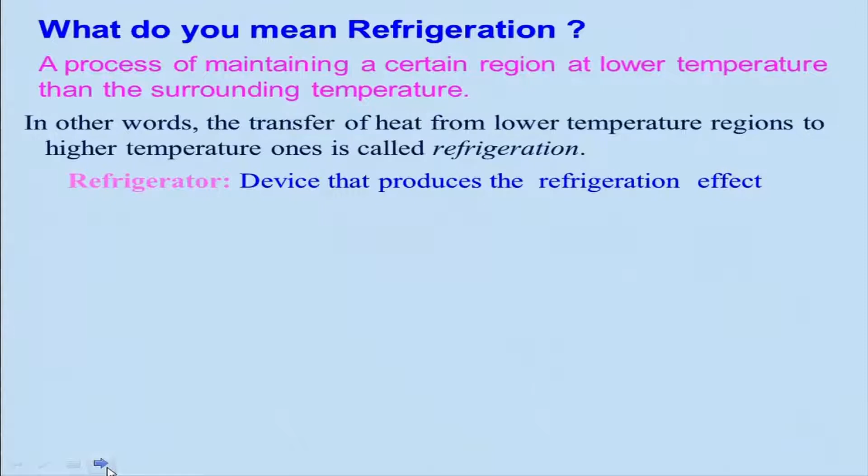In other words, what is being done here is heat being transferred from a lower temperature region to a higher temperature region. Of course, you need to provide some amount of work, and when we do that, we call it refrigeration. Basically, a refrigerator is a device that produces the refrigeration effect, or the cooling effect, you can say that way.

Air conditioning is a little different. It is not only producing the cooling effect, but it also conditions the air, meaning the quality of the air has to be controlled. So we will be discussing the refrigeration cycle, the cycle used for analyzing the refrigeration system. We call it the refrigeration cycle. In other words, the refrigeration system operates on this cycle.

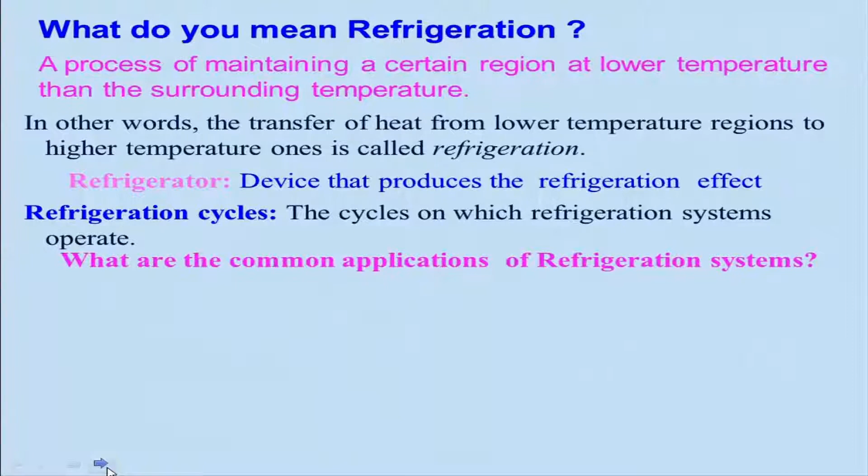If you look at the common applications of refrigeration systems, as I told you, there are air conditioning systems, refrigerators used for cooling food and other materials that easily get spoiled, and other things in factories. You might have seen on the way to our academic campus a liquid nitrogen plant and liquid hydrogen plant. These also use refrigeration systems, and I would suggest you go check what is happening there and what is being covered in class.

So the common applications of refrigeration systems are refrigerators, air conditioners, heat pumps, and gas separators. If I want to separate gases from air, say nitrogen or oxygen, I can go for low temperature, convert into liquid, and then separate them. Ice production is a very age-old application, and liquefaction of gases is another. For example, we use liquid hydrogen and liquid oxygen in spacecraft, rocket engines, and cryogenic engines. There are several other places this can be used.

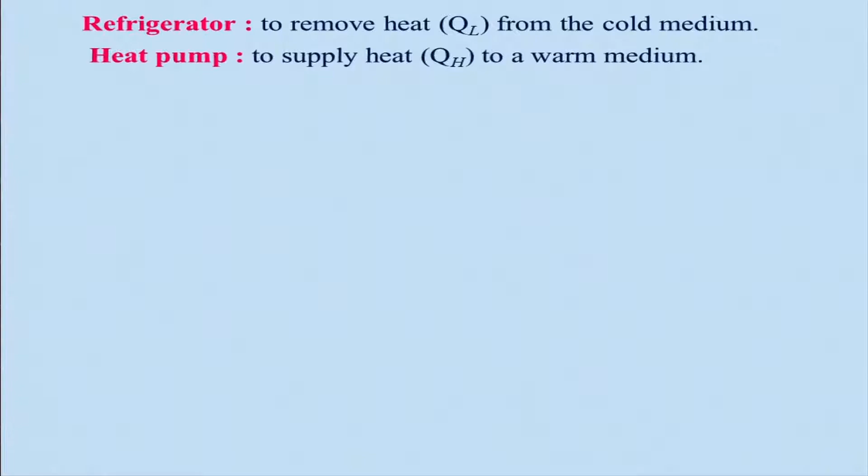As I told already, the refrigerator is basically to remove the heat QL from the cold medium or the cold region, and the heat pump is to supply heat to the warm region. In winter we use it, and we will be giving some heat to the warm region.

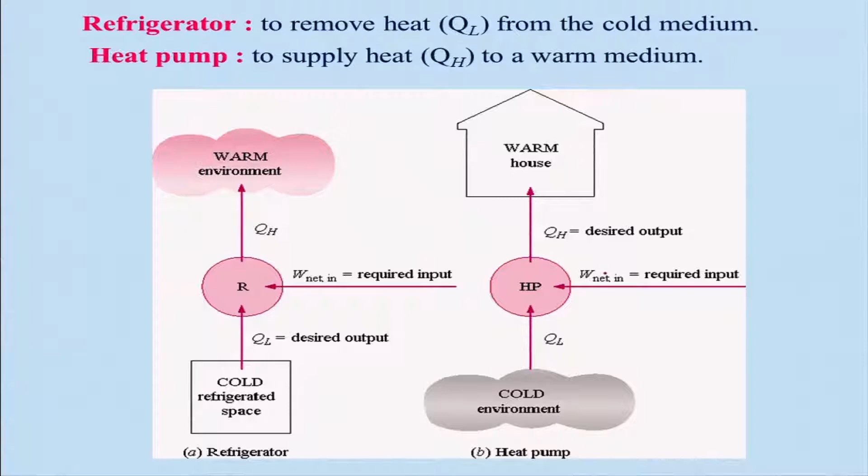If you look at this schematic, in the cold region or refrigerated space, we take some amount of heat QL, which is the desired output, then we give some work input, and we reject QH amount to the warm region in case of a refrigerator. Whereas the heat pump is the other way around: it takes a certain amount of heat QL from the cold region and supplies QH amount of heat to the warm region, which needs to be maintained properly in the winter season. Of course, you will have to give some work input to the heat pump.

How do we characterize the performance of a refrigerator and heat pump? In case of the heat engine, we use thermal efficiency, or we can also use second law efficiency, just to check how good or bad it is, or what are the scopes of enhancing the thermal efficiency of a heat engine.

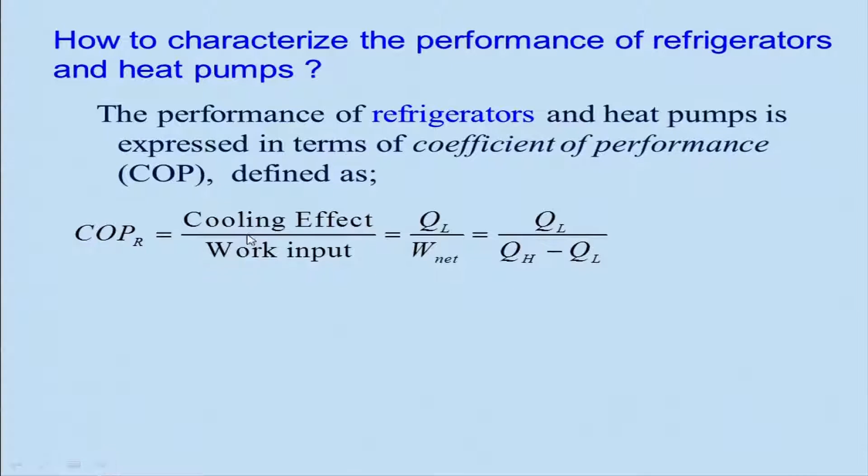But in this case, we will be using the coefficient of performance. The coefficient of performance for the refrigerator is nothing but the cooling effect divided by the work input. And if you look at this, the net work input will basically be QH minus QL.

Similarly, for the heat pump it is the other way around. We take the heating effect, that is QH, and the net work done; the coefficient of performance for the heat pump is the ratio of the heating effect divided by the work input. The difference between the refrigerator and the heat pump is that in one case the desired effect is the cooling effect QL, and for the heat pump the desired effect is the heating effect QH.

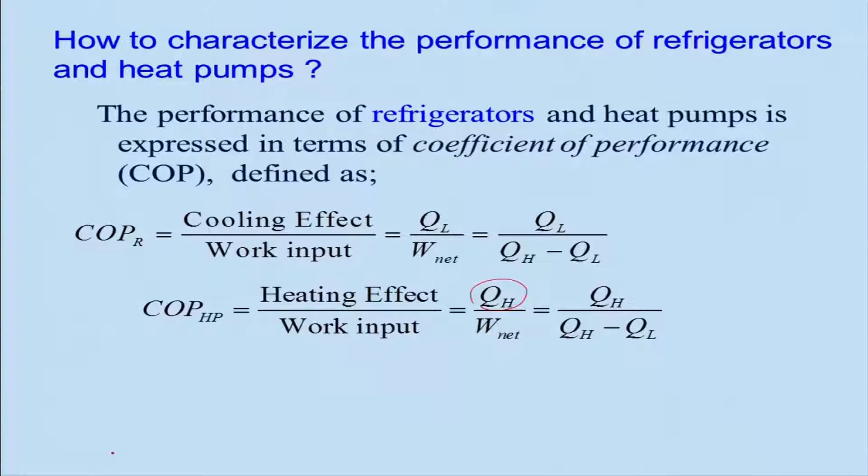Keep in mind that we don't really use a turbine, but here I'm just saying it is an expansion process. In real situations we use what we call capillary tubes or throttling valves, which we have already discussed. Let us look at what is happening here.

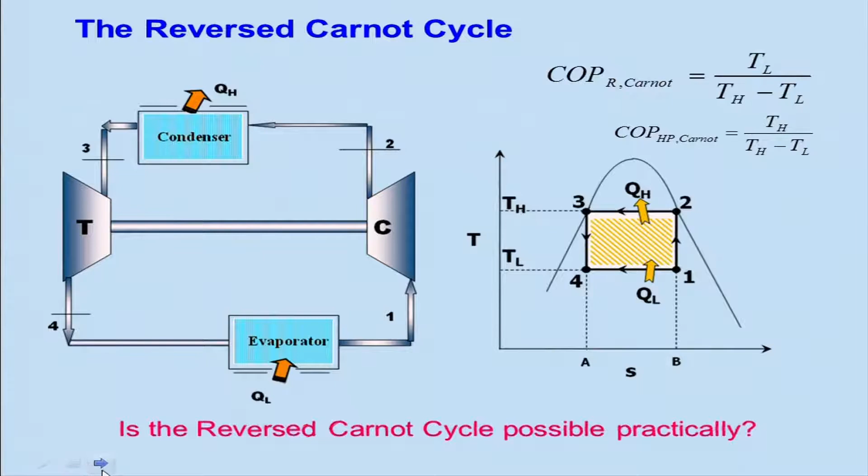As I told, the reverse Carnot cycle is not really possible practically. Now we will have to change the components or the process such that you can implement it easily. The turbine can be replaced by a throttling valve, and we use a capillary tube in case of refrigerators and other devices.

So the ideal vapor compression refrigeration cycle, because here we are basically compressing the vapor, and once it passes through the evaporator, it is vapor, and ideally we can say it is saturated vapor condition. Then you compress it isentropically, and then heat will be rejected in the condenser, that is condenser process 2 to 3, it will be rejected to the warm environment, and that is QH.

And then after that, we can call basically 3 to 4 dash isentropic expansion. But however, in the real situation it will be isenthalpic process, that is 3 to 4, which will be taking place. So this is the ideal vapor compression cycle.

If you compare the ideal vapor compression refrigeration cycle with the Carnot cycle, in heat rejection, the 2 to 3 process is the same constant temperature heat rejection. The only difference is the superheated vapor here at station 2, and then it comes to saturated condition.

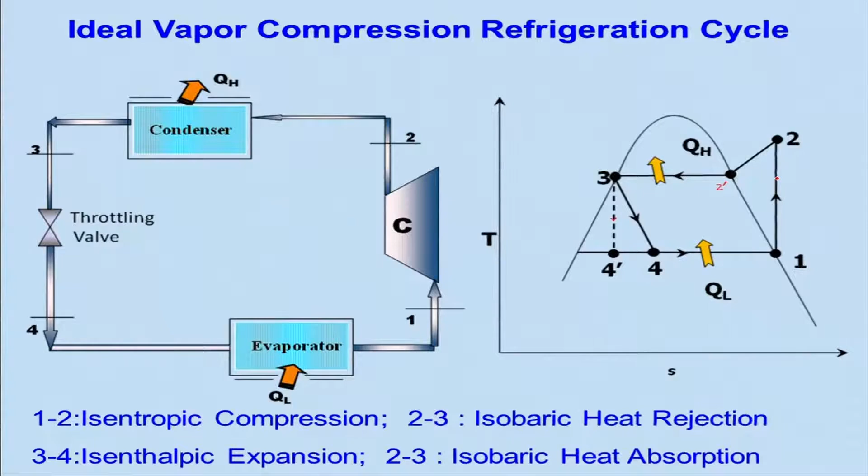So if you look at the same thing, we can see it in the P and H diagram, it will be very clear. The 3 to 4 is basically isenthalpic expansion.

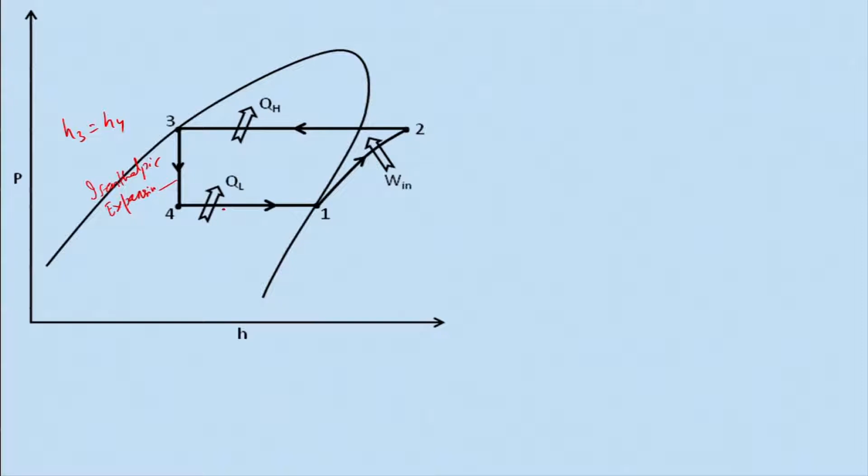Because why? H3 is equal to H4, and the 2 to 3 heat rejection, that is QH, is the constant pressure heat rejection, and 1 to 2 is isentropic compression, and 4 to 1 is again isobaric heat absorption. So we can analyze this thing.

What we will have to do is use the first law of thermodynamics, and we know that QL amount for the process 4 to 1 is nothing but H1 minus H4. We make the same assumptions here, that the flow is a steady process, there is no change in kinetic energy, no change in potential energy, and there is no shaft work in this case, for process 4 to 1, as it is a steady flow process.

So we will be using that. QL is equal to H1 minus H4, and similarly we can get W in, or the compressor work input, which is equal to H2 minus H1. And COP of refrigeration, QL divided by WC, that is the input to the compressor, is equal to H1 minus H4 divided by H2 minus H1.

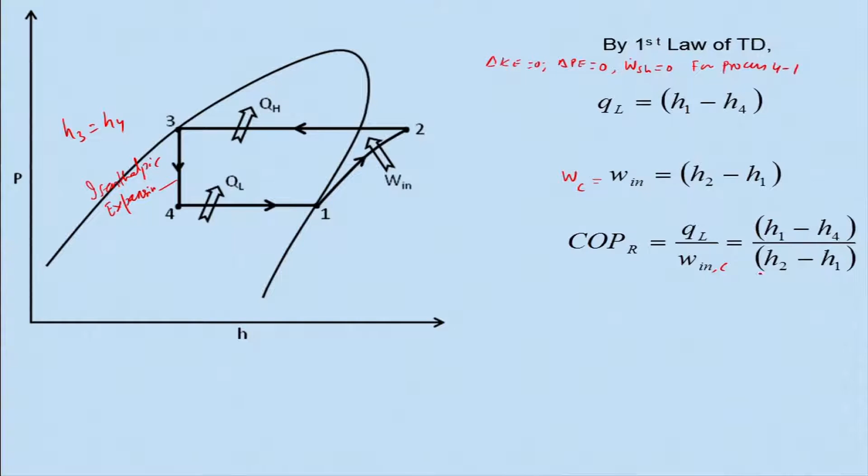We have seen that there is no work being produced by the expansion process because of the throttling process, H3 is equal to H4. And the question is, is this throttling process reversible? Certainly no. We have already seen that entropy is increasing during the throttling process, so as S4 is greater than S3, it is an irreversible process.

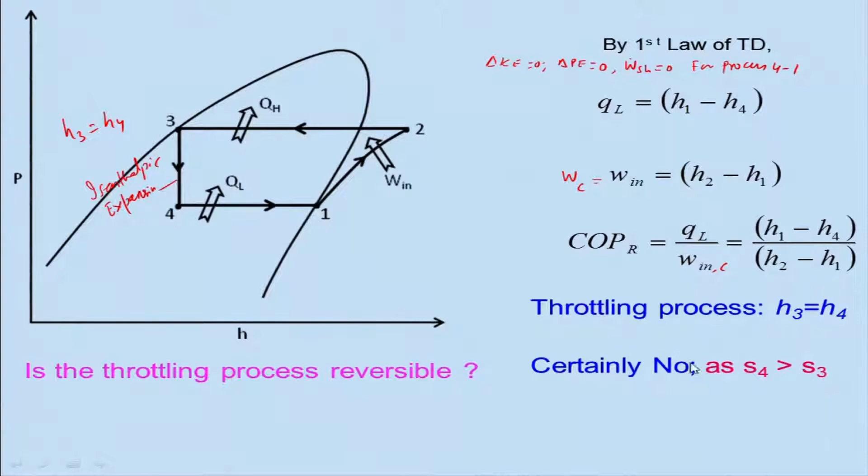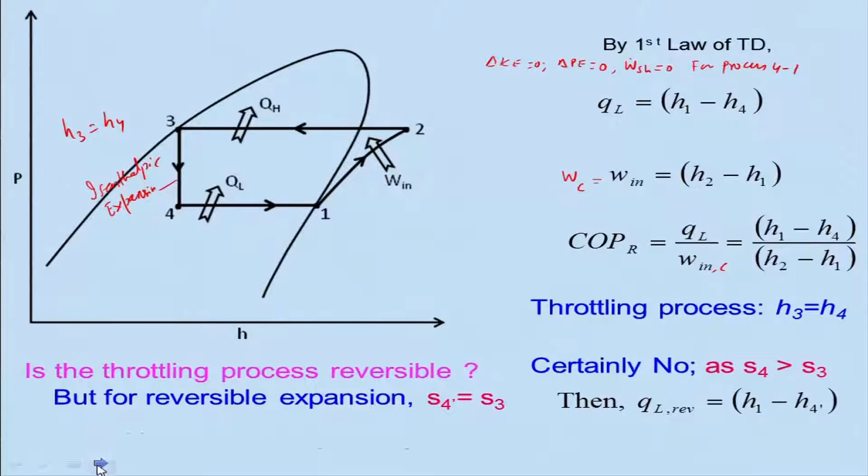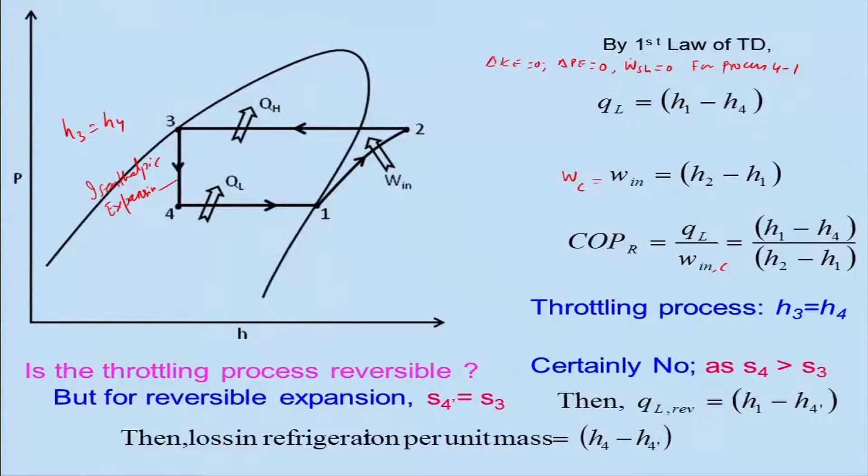So the question arises, how to choose a refrigerant? We need to look at the properties it should have. For example, can I use water as a refrigerant? Can I use air as a refrigerant? These are two fluids we are very familiar with, and they can be used. We will see later that air is used as a refrigerant for refrigeration systems, particularly for aircraft applications.

For a refrigerant, the boiling point must be lower than the temperature of the evaporator, otherwise you cannot really absorb the heat.

And the critical temperature must be high enough such that the phase change occurs in the condenser, because heat rejection is very important there. If a refrigerant's critical temperature is very low, it will remain in the vapor state, so for the vapor compression cycle, you cannot use it.

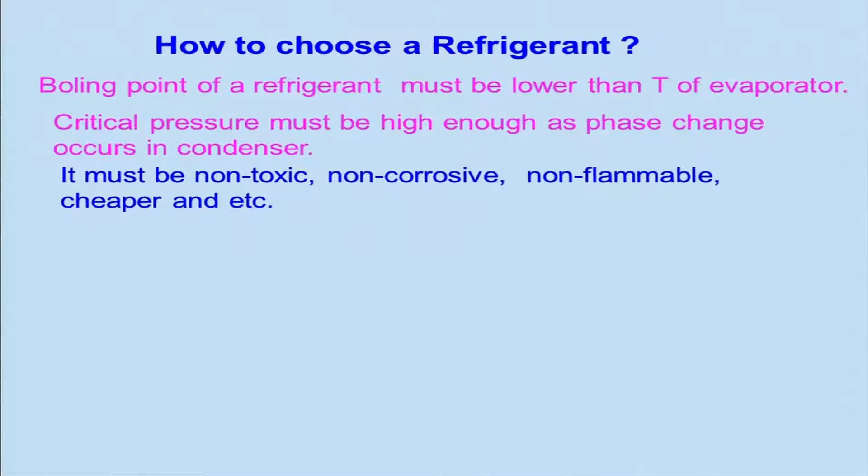It must be non-toxic and non-corrosive, since it passes through various components. If it is corrosive, it will erode the material, and the life of the refrigeration system will be very low.

It should be non-flammable, because if there is a leakage, there will be a problem of fire. It should also be cheaper, and there are other properties to consider. It must remain chemically stable while undergoing the cycle, since various processes take place like evaporation and condensation. If it changes its chemical properties, it will be problematic and lose its refrigeration properties.

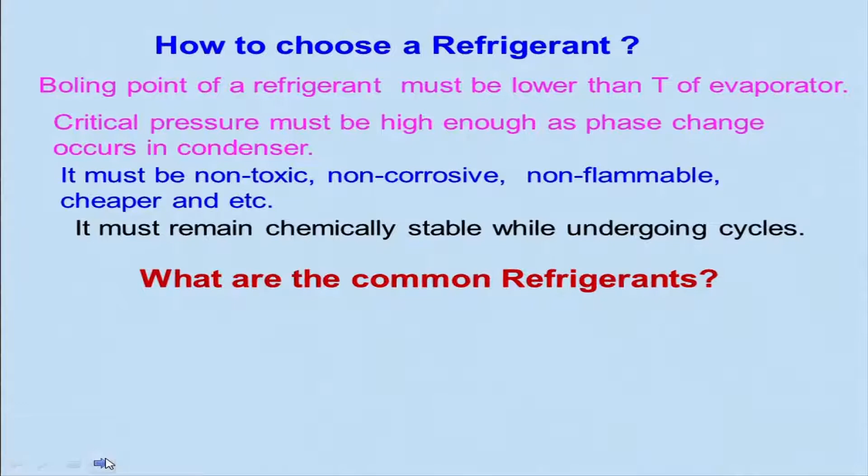So what are the common refrigerants? There are several of them; I will discuss a few. The oldest refrigerant is ethyl ether - you must have used ether, it evaporates very easily and cools down. Later, ammonia and methyl chloride, ethyl chloride, sulfur dioxide, and several others came into use.

Ammonia, although toxic in nature, is very much preferred in industrial applications because it has a higher COP, coefficient of performance, so the cost will be lower. One can also use hydrocarbons like propane, butane, gasoline, ethane, ethylene as refrigerants, but those are not used much because most of them are flammable in nature.

Then there are CFCs, chlorofluorocarbons, which were used in earlier days. There are three main ones: R11, R12 and R22, and several others like R115 and R105. R12 is used for domestic applications like refrigerators, and R22 is used in air conditioning systems. These are the causes of ozone layer depletion.

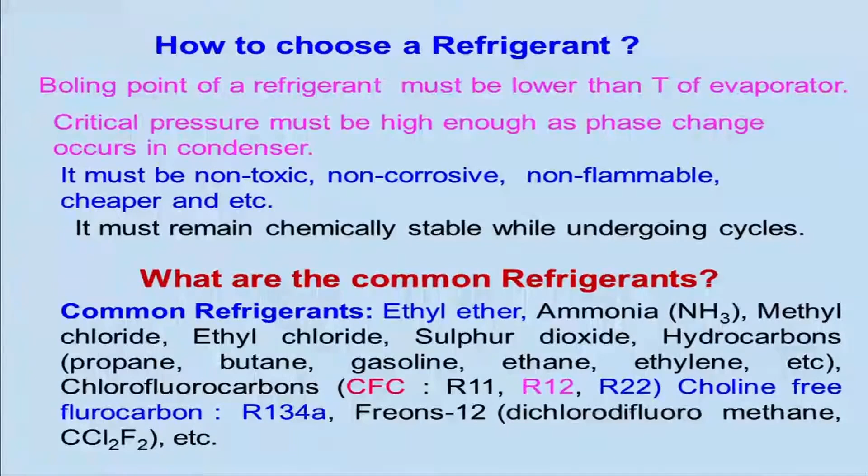So there is an urgent need for developing refrigerants which will be benign and also serve the purpose. It should not spoil the ozone layer, nor cause pollution or other issues. That is the important area where research people are working.

So we will take an example to illustrate how to calculate this. In an ideal vapor compression refrigeration cycle, 1.2 kg per second of tetrafluoroethane, that is R134A, is used as a refrigerant to maintain the cold region at minus 8 degrees Celsius. Its saturated vapor enters the compressor at minus 10 degrees Celsius and leaves the condenser at 40 degrees Celsius.

If you look at this, it is operating at this temperature. This is basically minus 8 degrees Celsius, because the refrigerant is used to maintain the cold region at that temperature, and the region is cold. The saturated vapor enters the compressor, that means T1 is minus 10 degrees Celsius, and leaves the condenser at point 3, which is 40 degrees Celsius. This is T3.

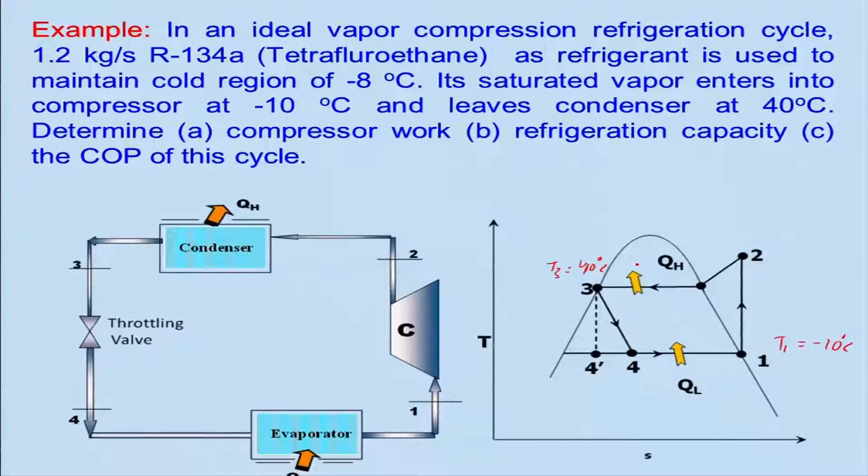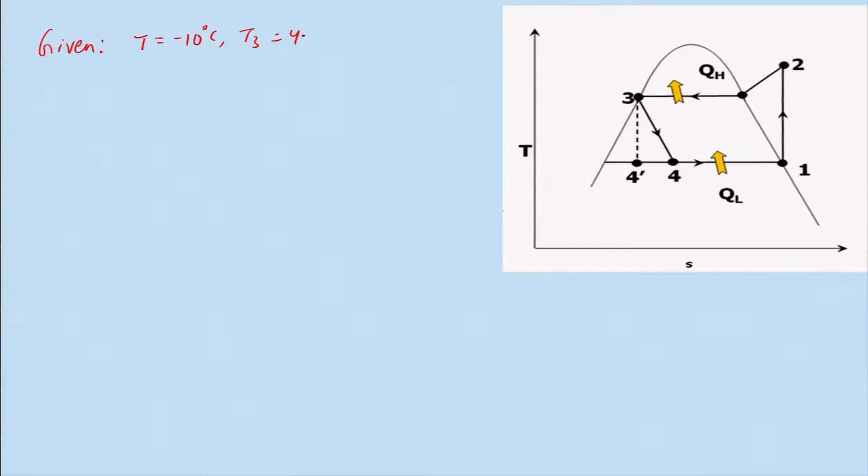So if you look at what is given here: T1 is minus 10 degrees Celsius, T3 is 40 degrees Celsius, and the mass flow of the refrigerant is given as 1.2 kg per second. We need to find the work done by the compressor, the refrigeration capacity QL, and the COP of the refrigerant.

So what we will do is look at the refrigerant table corresponding to minus 10 degrees Celsius. We can use the R134A table at minus 10 degrees Celsius. What we will get is H1 equal to Hg, at the saturated vapor line, which is 392.2 kilojoule per kg.

And we will get Sg, which is equal to S1, is 1.7319 kilojoule per kg Kelvin. And the pressure, P1, that is the saturated pressure, is 201.7 kilopascal.

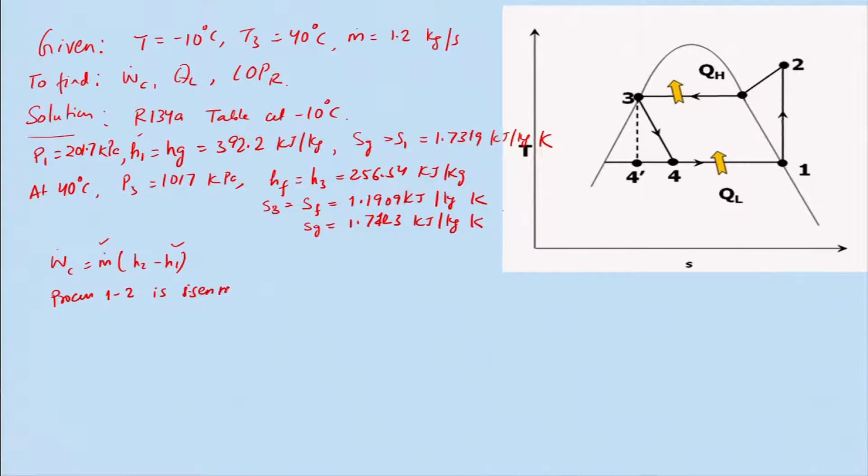Because the process from 1 to 2 is isentropic, that is isentropic compression, I know the entropy at this point, S1. Therefore S1 is equal to S2. We know S1, that is equal to 1.7319 kilojoule per kg Kelvin.

From this, at 40 degrees Celsius, we can find SF and also SG. If you look at this SG, it is less than S2, that means it is superheated vapor refrigerant. As S2 is greater than SG at 40 degrees Celsius, therefore state 2 is at superheated condition.

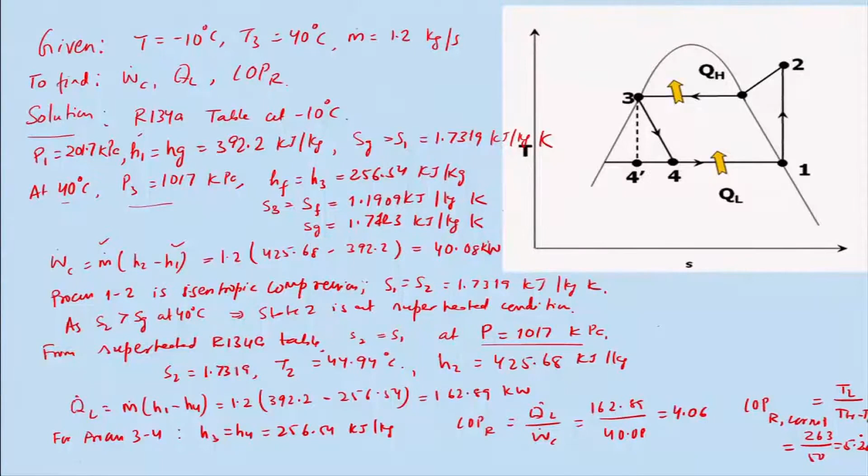So by this one can learn how to calculate and how to do that. And let us now discuss about the actual vapor compression refrigeration cycle.

Earlier we had discussed the ideal vapor compression refrigeration cycle, because the processes in the compressor need not be isentropic in nature, and also during heat rejection we considered an isobaric process, and heat absorption also isobaric, in case of the ideal refrigeration cycle, but that won't be possible in an actual situation.

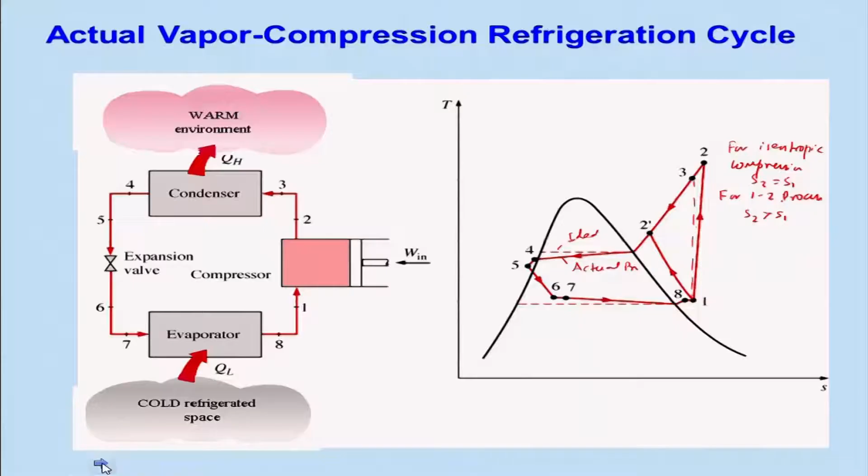And as I told earlier, there will be a pressure change in the evaporator also, so the process extends a little from state 6 to state 7. So in this process, what is happening? You will have to give more work input to the compressor, and the cooling effect also gets reduced. As a result, COP will be lower in the actual vapor compression refrigeration cycle compared to the ideal one, which is expected. We have seen in the case of heat engines too that the thermal efficiency of the actual cycle is lower than the ideal cycle.

Let us look at a household refrigerator system. This is your compressor, which is hermetically sealed, what people use, and there is a condenser coil. If you look at an old refrigerator system which is not covered, nowadays they have covered it. If you put your hand on it, it is very hot.

You might have observed that, going back along the sides, there is a lot of tube. Therefore, there will be pressure losses. And this is your capillary tube, what we call a throttling valve or expansion valve. This is very simple, like a hypodermic tube, a small diameter tube, very simple, and it is closer to the evaporator coil which remains in your freezer compartment.

That is maintained around minus 18 degrees Celsius, from where the heat is absorbed, and then it passes through. The other places maintain a temperature around 3 degrees Celsius in your household refrigerators, not like other refrigerators where lower temperature is used for keeping ice cream and everything. Therefore, it is important to keep ice cream and other things in the freezer compartment, otherwise they will melt out.

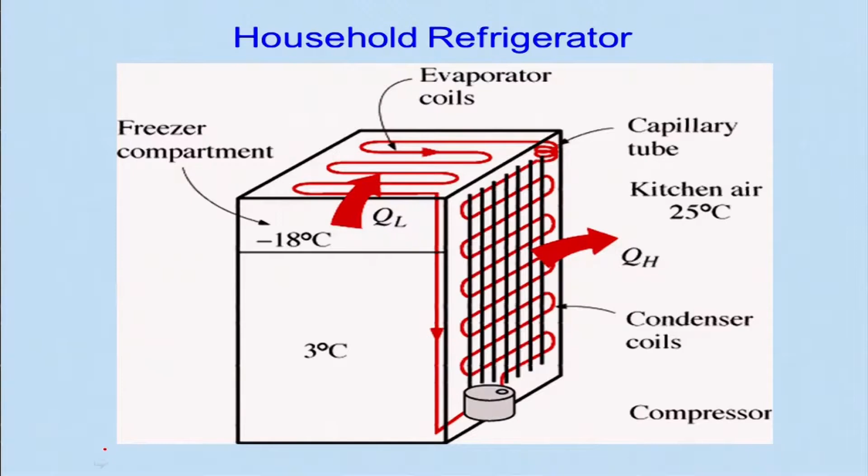So this is the typical kind of setup that is used. Of course, liquefaction systems and other applications require much lower temperatures, and you may not achieve that with the same refrigerant. You may use different refrigerants together, and that is known as a cascading refrigeration system, which we won't be discussing, but if you are interested, you can look at it.

As I told, the air conditioner which is used for cooling can also be used for heating in the winter season, as a heat pump, because all the systems are similar. If you look at this, there is an expansion valve and a compressor, and this is your indoor coil, and this is your outdoor coil. Sometimes it will act as a condenser, and sometimes it will act as an evaporator, so you just change.

So in this case, what is happening? Here we are using this as a heating mode, meaning we take the indoor unit fixed in the room. What happens here? The refrigerant is compressed, and when compressed it reaches a higher temperature, so it gives the heat out here, QH. Then it goes and is expanded, reaching a lower temperature, and it goes back and absorbs heat from outside, QL. Then it goes again to be compressed, so it acts as a heat pump mode.

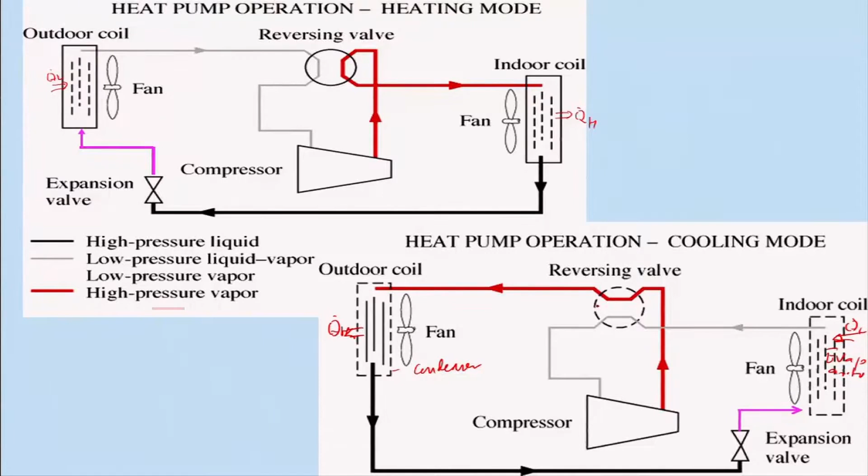And after that, it will go to the compressor again and compress, and the cycle is complete. So this will act like an evaporator, and it will be taking heat QL amount from here. So you just use this reversing valve, and you can operate your air cooler as a heat pump in the winter season and as an air cooler in the summer season. So this is a very simple technique which is being used; one can go for it.

So we have looked at these vapor compression cycles. Of course, there is a vapor absorption cycle which we have not discussed, but there is a simple gas refrigeration cycle which is being used, which uses gas, not vapor.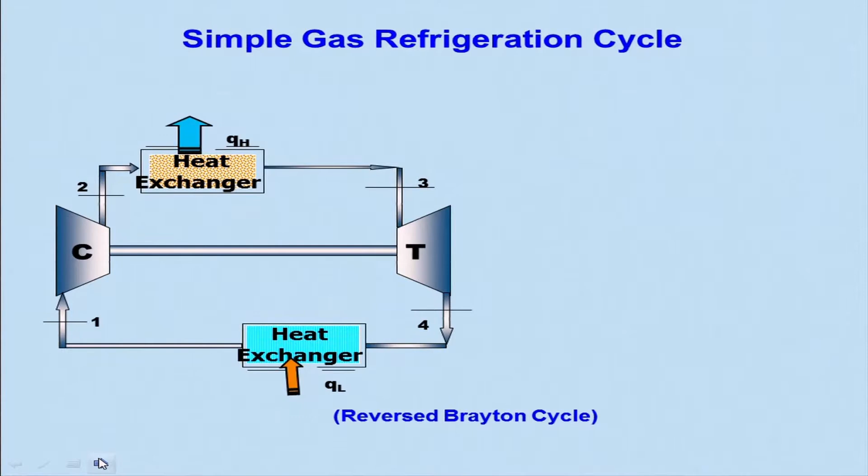We have already looked at the Brayton cycle for generating power; this is just the opposite of that. The 1 to 2 process is isentropic compression, the 2 to 3 process is heat rejection, 3 to 4 is again isentropic expansion in the turbine, and 4 to 1 is heat absorption from the cold medium. As a result, we are just reversing the other way around and using that.

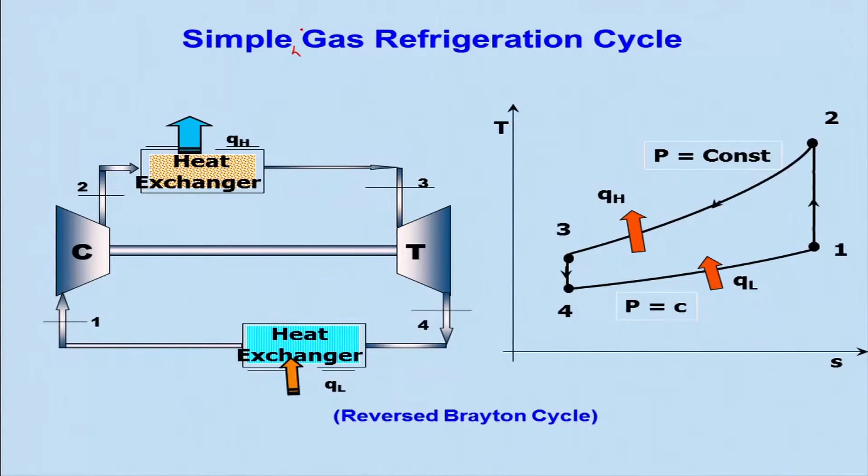So this is the ideal gas refrigeration cycle. We will be discussing the ideal, simple gas refrigeration. There is also complexity involved in it, which we won't be discussing.

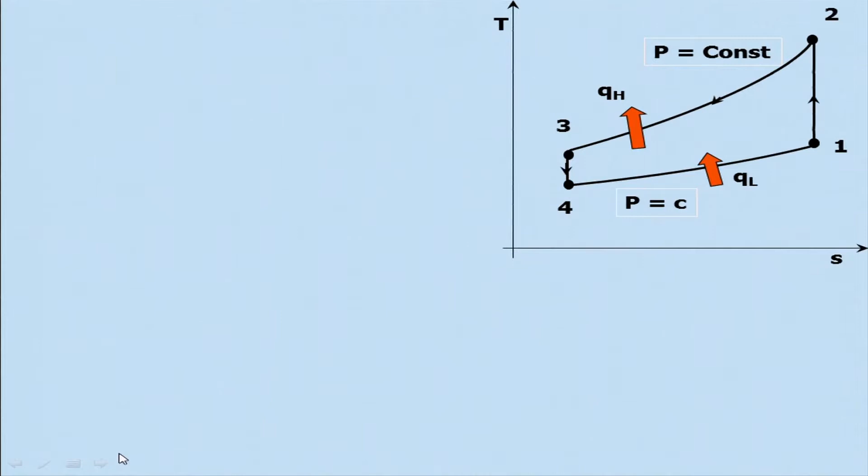So what we are looking at now is basically the ideal reverse Brayton cycle, and we need to analyze it by applying the first law of thermodynamics for each component. For example, for the process 4 to 1 where heat is absorbed, that is QL, which is nothing but H1 minus H4.

We will make the same assumption of steady flow process, with change in kinetic energy equal to 0 and change in potential energy equal to 0. So QL will be equal to H1 minus H4. Similarly, QH will be equal to H2 minus H3, the same thing.

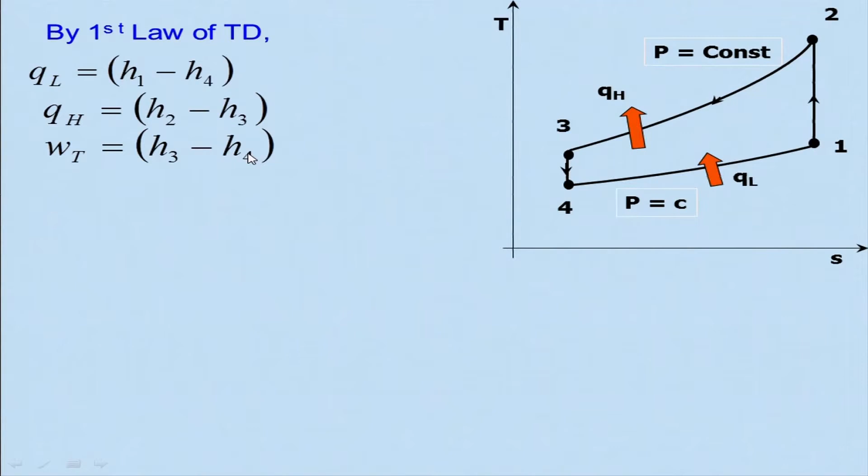The work is basically done by the turbine. The turbine produces some work, H3 minus H4, and the compressor work is H2 minus H1. The net work will be WC minus WT, which is equal to H2 minus H1 minus the quantity H3 minus H4.

If you look at the COP, coefficient of performance, it is nothing but QL divided by W net. We can express this enthalpy in terms of temperature assuming Cp remains constant, though in actual situations it won't be constant. This is an ideal assumption we are taking, along with the ideal gas assumption.

So, therefore, the coefficient of performance of this gas refrigerator becomes T1 minus T4 divided by the difference T2 minus T1 minus the bracket T3 minus T4.

If you look at this, the COP of gas refrigeration will be less than the COP of a vapor compression refrigeration cycle. You can do a simple calculation and see that whenever it is operating between two temperatures, this will be lower.

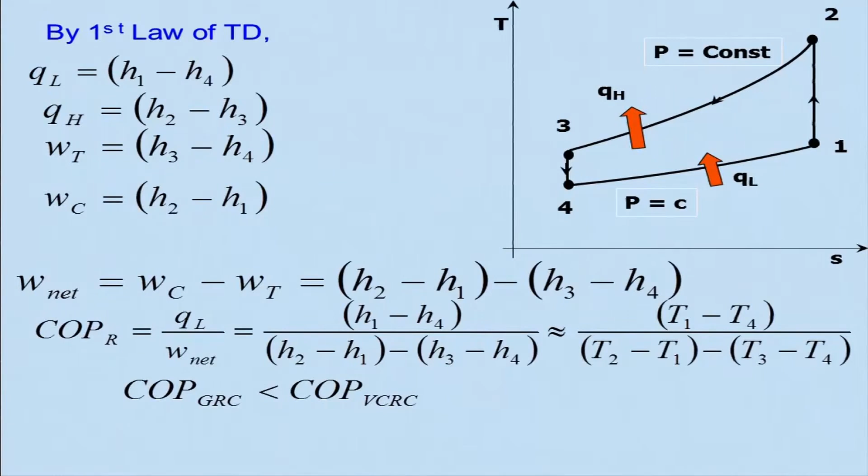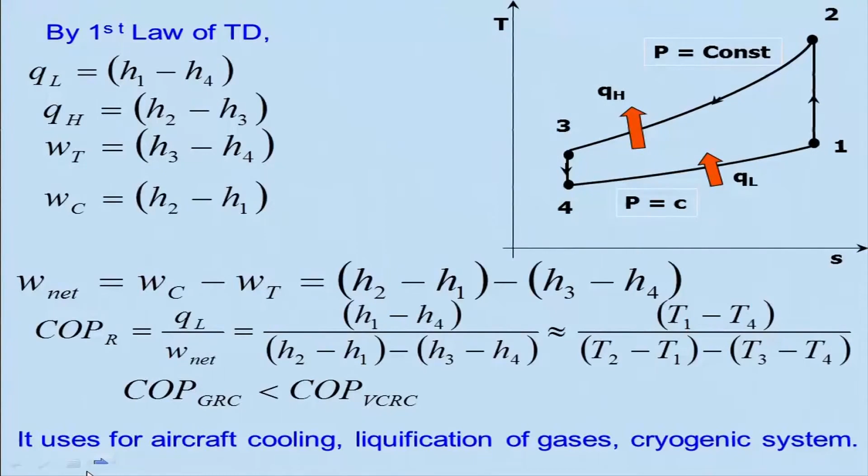So it is used for aircraft cooling, liquefaction of gases, and of course cryogenic systems. Do not think that this is used only in such simple cycles; there will be varieties or complexities involved, in the sense that regenerative and other techniques are used so that COP can be enhanced.

So we have given you an overall view of the refrigeration cycle. We will stop over here, and in the next lecture we will discuss how to handle mixtures and the properties of air, because we will be looking at air conditioning next. Thank you very much.